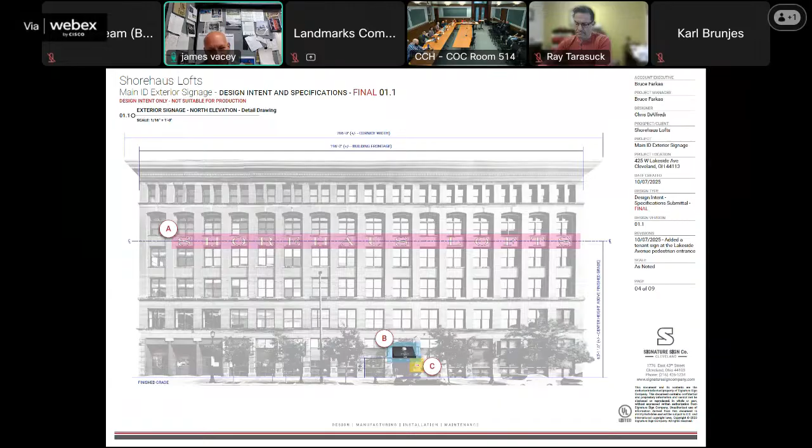This is actually showing a more detailed drawing of the letters on the building. The next page should be the awning. So this is a Sunbrella material awning with heat transfer digital prints on it.

It was brought up at the local meeting that they weren't sure there was downlighting, but yes, there is in fact downlighting. There had been downlighting on the entrance before. The awning itself is non-illuminated.

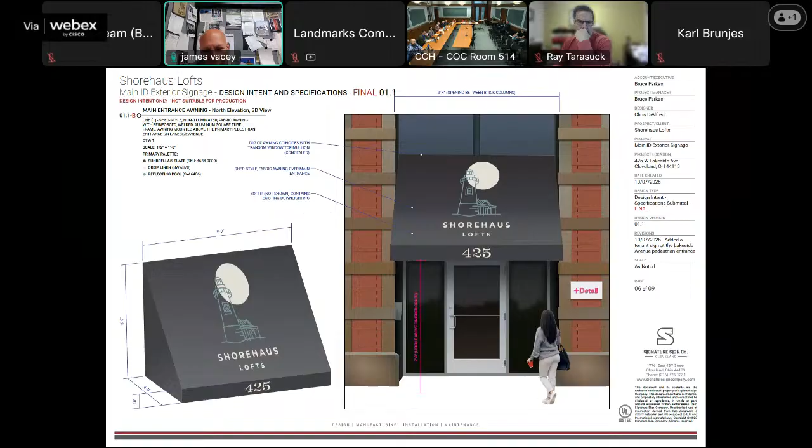And then if you look on the right-hand side, there's a sign on the front of the building for Plus Detail. This entrance here, that's the only business that enters through that door. All of the other traffic through the main door will be for the residents that live in the apartments upstairs. The other businesses located on the first floor enter at another entrance, I think on 6th Street.

There was a question that came up about the detail sign. It looks like it's encroaching on the sandstone, but it's in fact not. It's just the way that the artist or the designer put it in there. It will not be encroaching on that sandstone. It will be in between the sandstone pillars there. And here again, the same mounting will proceed through the mortar joints and will not interfere or damage any of the original brick of the building.

And I think, because it's a residency, we're looking for a variance. I think Dan said it was 403 square feet. That's actually for the letters on the building. So that's what we're here for today. If there's any questions, I'll try to answer them as best I can.

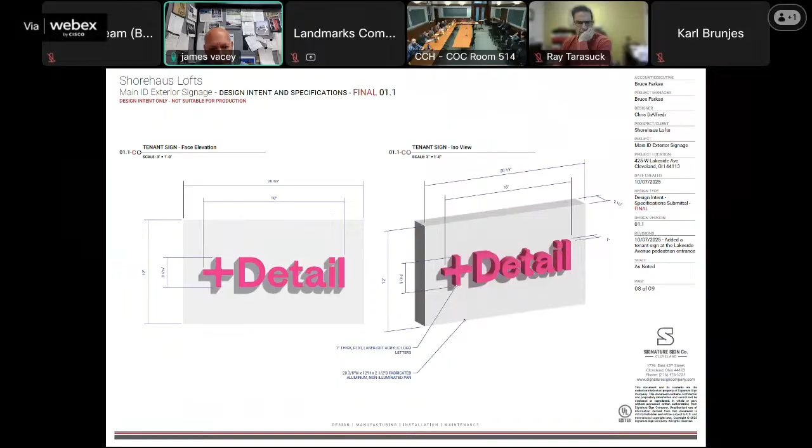Okay, thank you for the presentation. Before we get to our questions and comments, we'll start with Local Design Review Committee feedback.

Thank you, Madam Chair. This project was reviewed by the Greater Downtown Historic Design Review Advisory Committee. They originally came on October 1st, and at that time only had the signage for the Shorehaus Lofts on the building face and the canopy. And there was a lot of questions from that meeting on lighting for the entrance, spotlighting on the awning deck, and then questions about the occupancy or use of the building.

Who's using that entrance, is there commercial units in the building since the signage on the wall would just be for the residential units, and if there's a signage plan for the building - kind of questions on that.

And so through that process, the project returned back on October 15th for review, and they included the Plus Detail signage. And so that's why this project actually has two case numbers - one for the Shorehaus Loft signage and one for the Plus Detail signage.

And at that time, the committee discussed installation through mortar joints and kind of how it's installed and how it works with the residents there and also the commercial tenants.

And so the committee on the October 15th meeting did make a recommendation for the issuance of a certificate of appropriateness with the notation that fasteners be installed through the mortar joints and that the secondary sign, the Plus Detail sign, be located on the brick and not touching the sandstone, as our applicant mentioned, and then support for any of the signage variances needed.

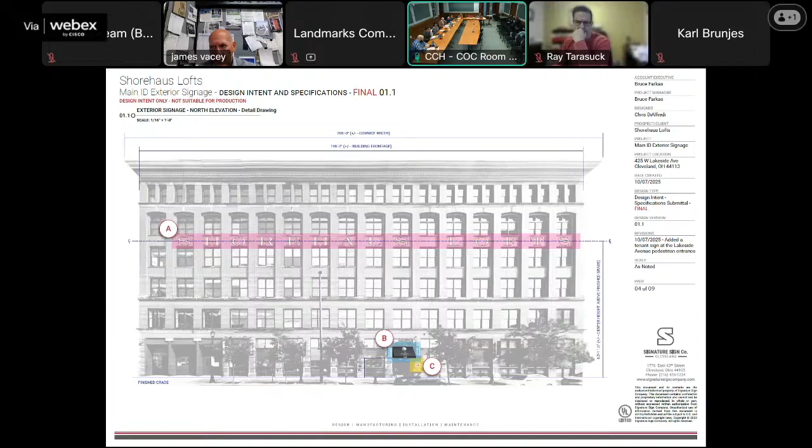And so I don't have any problem with this and would support the applicant in this submission. Thank you, Mr. Strickland. Other questions and comments from the commission? Mr. Lozier? Thank you, Madam Chair. Can you confirm the thickness of the aluminum material for the large sign? It's 1/8 inch aluminum.

So the letters are roughly 4 feet by 7.5 feet. I'm concerned a little bit about the thickness of the material, and to me it might seem too thin to actually be able to self-support itself. Was there any consideration for making that thicker?

I don't think that will be a concern as far as the thickness. 1/8 inch material is fairly thick material, given the fact that the welded studs are on there. I'm just trying to figure out what is your concern.

Well, it's not clear if it's stood off of the building by any dimension. It's right on the building, so it has full northern exposure to the elements. I know it's more robust for maybe smaller components, but for something roughly the size of a sheet of plywood, 4x8, I get concerned about the thickness holding up over time — wind loads, snow loads, things like that on the face. I don't think this will oil can, but just a little bit of concern about the overall thickness of the material.

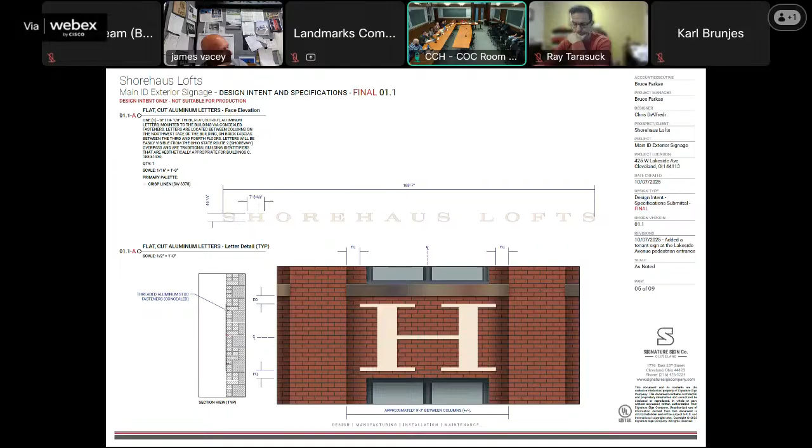Well, we have a lot of history as far as installing signs in the Cleveland area. If you've seen the Cleveland script signs and some of the wayfinding signs in downtown Cleveland, you see some of the work that we do. East 4th Street is another example of some of the signage that we do. If you've seen the new Asia Gate sign on 33rd and Payne, that was one of our designs there that we worked on with Jason Wong.

So we feel that... I was asking specifically about this type of sign and its performance. And do you have specific details on the number of stud fasteners that will be utilized for each letter to provide necessary stability?

Yes, we're going to have Bruce Farkas, the owner, here to shed some light on the questions. So, we don't have a specific number of fasteners. I would expect it would probably be 6. In terms of material, this is 1/8 inch aluminum. It's not that big, it's going to go flush to the wall. I have zero concern about this installation. Zero, of any issues of any kind, oil canning or stability or wind load or any of those things.

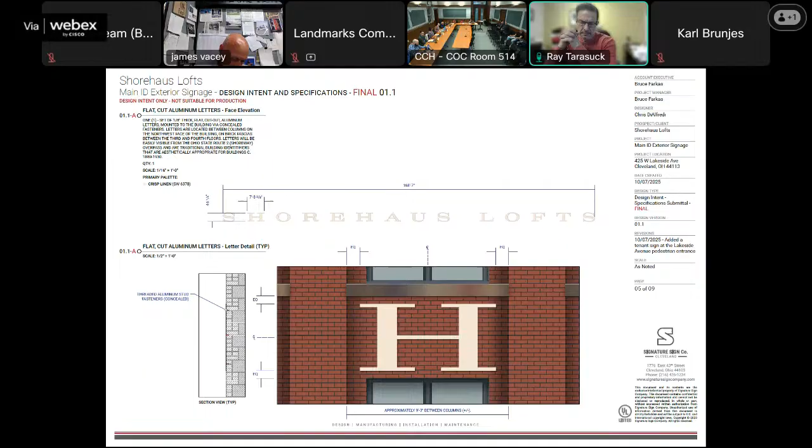Thank you, Ms. Anderson. We have a motion, we have a second. Any further discussion? Not seeing any. Mr. Musson, please call roll. Ms. Anderson, yes. Mr. Lozier, yes. Director Mersman, yes. Mr. Samberry, yes. Mr. Strickland, yes. Mr. Tarasuck, yes. Ms. Strat, yes. I'm sure the motion passes unanimously. Excellent, congratulations. We look forward to seeing your project move forward. Great, thank you very much, board.

Thank you. We'll then move on to our next applicant, located at 11401 Lorain Avenue, Cleveland Christian Home Campus renovations. Good morning. Good morning. All right, so I appreciate everyone's time this morning. My name is Lucas Moore. I'm with CPL Architecture here in Cleveland.

So the Cleveland Christian Home project is in a 1920s building, but it is a behavioral health system that is utilized in this building. So our main goal here is to achieve the certificate of appropriateness to move forward with a building permit that allows us to maintain the historical nature of the building while bringing it up to behavioral health standards of today, for the safety of its residents. On the screen here, you'll see a rendering of the front building.

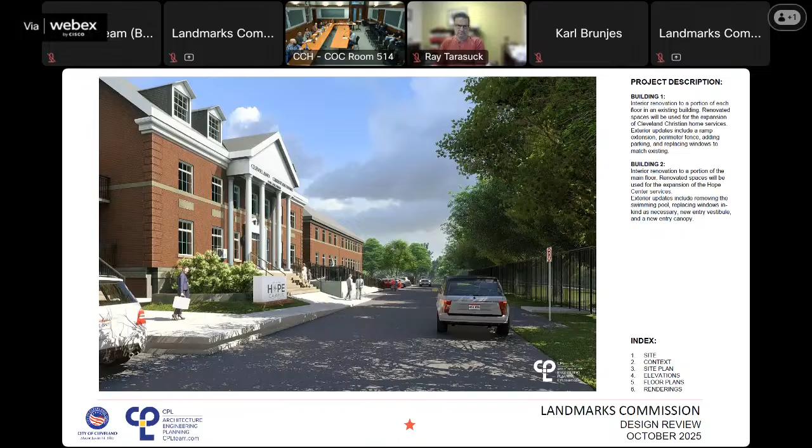We have modified the windows for replacement so that they are better suited for handling behavioral health units. Existing units are gridded with integral blinds, but they are double hung windows. You'll see here that we have added just vented windows at the top. In situations where it's inappropriate for residents to have access to operate those windows, the simple hardware will be removed for the safety of those residents, but it will maintain a consistent look across the front of the building to try to maintain the historical value. If you could move forward to the next slide, please.

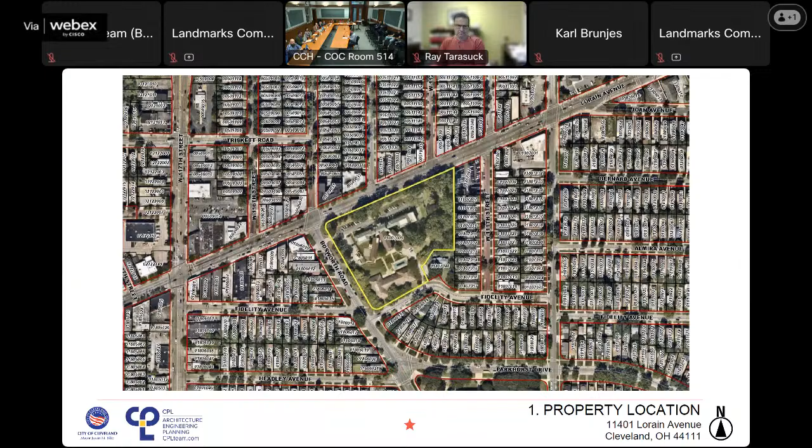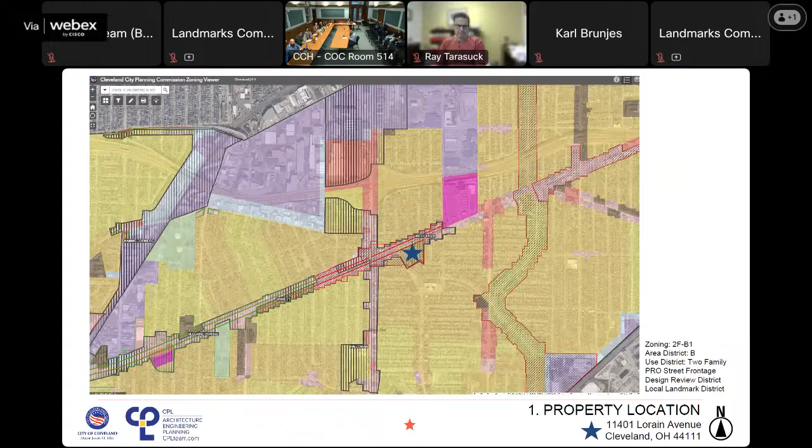So going through the checklist here, the next two slides are looking at our zoning information. On the next slide, you'll see that we are in a historical district itself. And then if you wouldn't mind going to the next slide.

Some existing background on the two buildings that we have on this campus and the work that's being done. You'll see going around the building there is a lot of trees and landscaping, but we also have to have our secure perimeter, not only to help the residents prevent eloping and leaving the campus, but some of the affiliations of the residents have had issues with outside influence coming into the campus, which would affect the treatment of the residents. So you'll see that we do show some fencing, for instance in image 4, that we are looking to expand on and replicate, as you'll see in future slides.

But the existing state of the building, image 5 there on the closest window, you can see windows that have been recently replaced from an approval from February of last year through Landmarks. So the rest of this facade is now on this approval. The front entrance that you see in image 6 of the main building, those columns are being replaced in kind. We have found a manufacturing company that can replace them almost exactly without needing to laser or 3D print anything.

On the lower portion of the slides, you'll see 7, 8, and 9 are actually a separate building, currently or previously used as a school, but now will act as a welcome center, having a new drop-off area. This building will be used for residents coming in 23 hours or less, so no sleeping overnight. These are residents and children who are being brought here due to their parents maybe getting arrested or being displaced, and currently they're being housed in whatever social office they can be in. So now, with this moving forward, they would be brought to this system, receive the care and attention they need, and have a safe place to stay while some things are being figured out outside of their control.

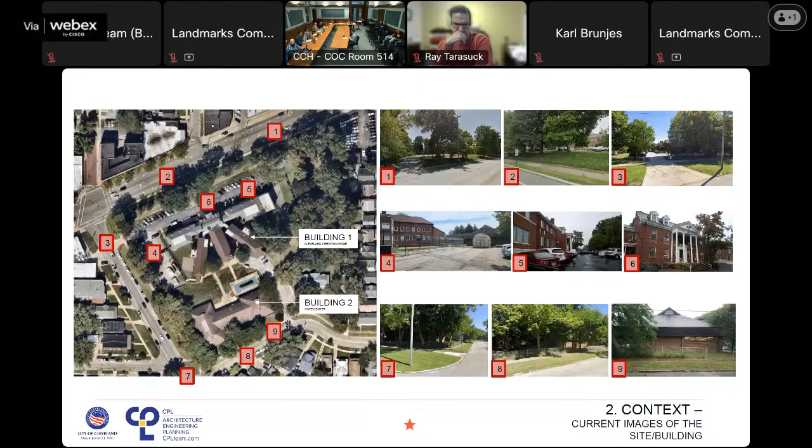On the next two slides, we have some site information. So we are enlarging the site plan as it is today, mainly because of the advancement in the treatment course that we're trying to do. They need additional staff to give more one-on-one treatment to these residents, so we are expanding that staff parking lot.

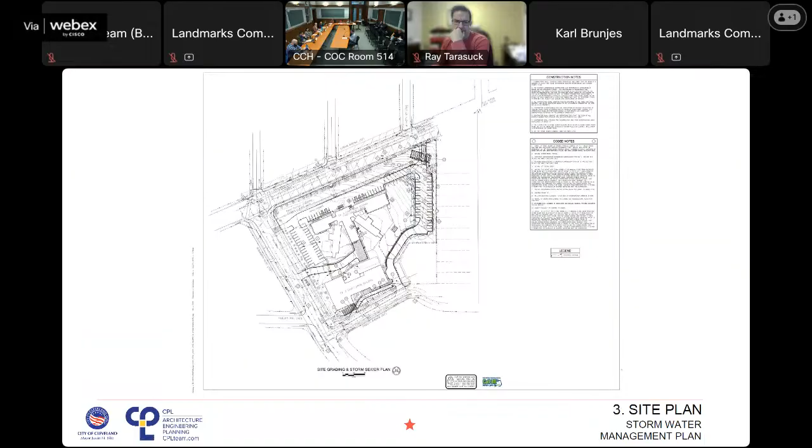The next several slides address some of the checklist items. We wanted to provide everyone with the erosion control and our underground water detention. If you wouldn't mind skipping ahead to slide 14, where we actually get into fencing, Jessica, you'll see those are just a lot of our underground and water treatment or water retention details.

The next couple slides are our elevations. On the next slide, you'll see the existing windows on the topmost elevation. You can see some of them are grayed out, but the remainder will be replaced in kind with that vented model. If you go to the next slide, there's more of a graphic to present that.

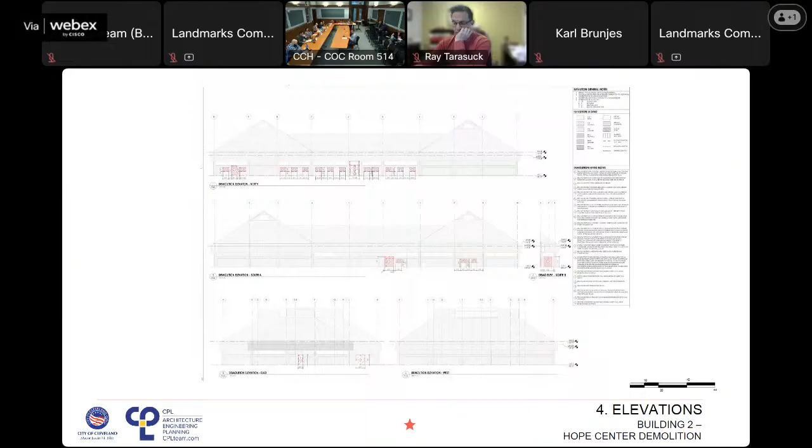The next several slides are for your reference as you're reviewing, showing our floor plans. This is on a separate permit. There are a couple more elevations of the second building as well. That building is being replaced in kind due to some poor conditions of the windows today, so those will be replaced. This building was built in the 1980s, so it's less historical, but still within the historical zone.

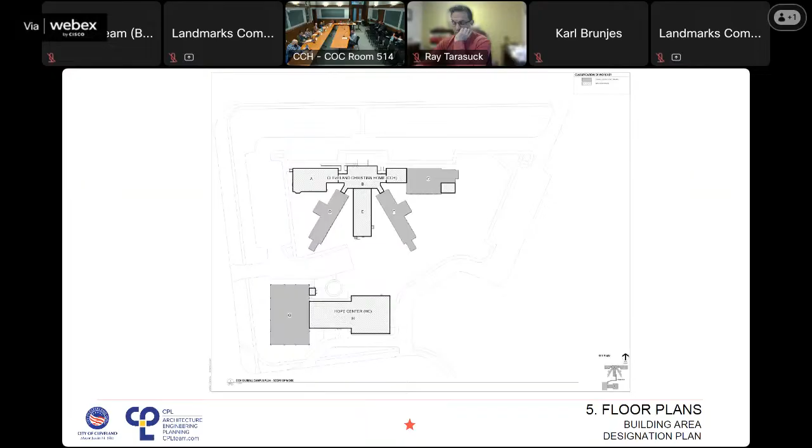If you could move forward please. Keep going please, there's sometimes a delay. It's okay, this is just to help with the floor plans. This is our key plan to show you where the next several slides of floor plans are referenced, for your reference of what is going on in the interior.

We can go through these quickly. This is on a separate permit, so we were able to start some of the interior renovation work early, as it did not affect the exterior of the building.

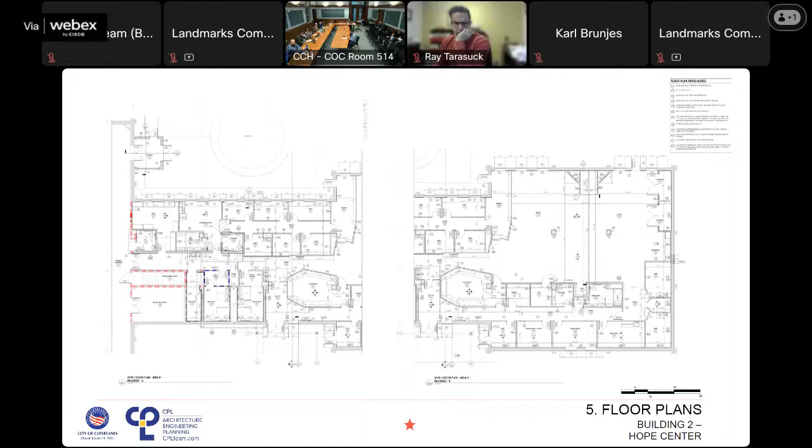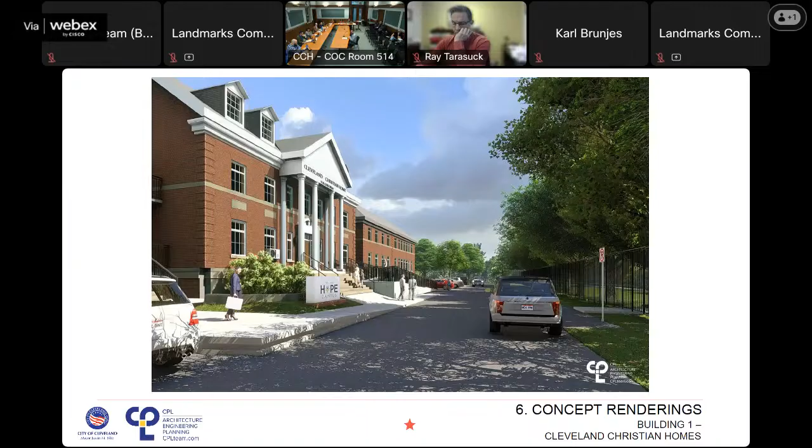The last two slides reiterate the rendering that we saw on the first slide. We did update this after the meeting last week to show those windows more consistent with our design intent. The next slide shows that second building's drop-off area, to give it more of a welcoming site for kids who are currently going through some traumatic instances.

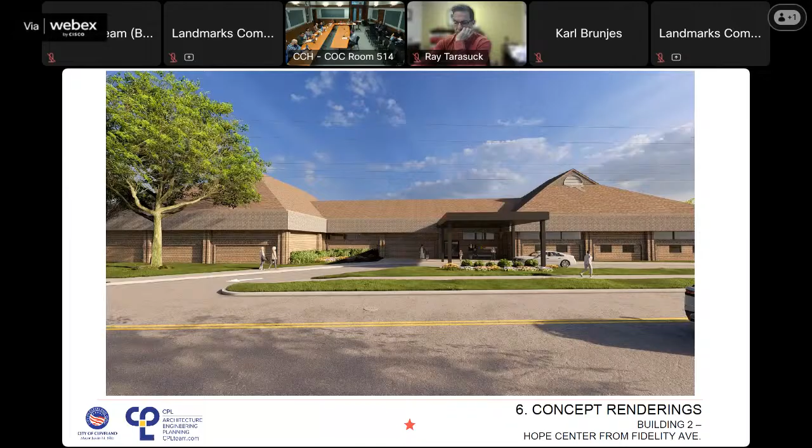So I appreciate everyone's time today. Is there any questions? Thank you for the presentation.

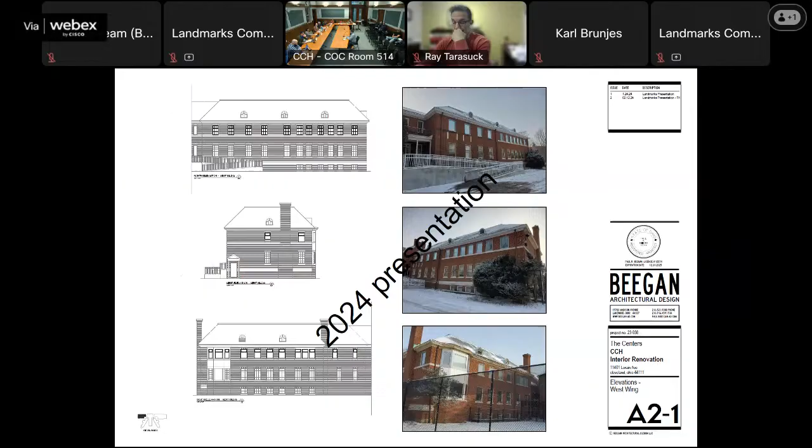Otherwise, we have more detail than the local committee had regarding the windows, which is likely where their questions came from. On screen now are the 2024 windows you approved, which are being proposed as replacements on all elevations, mainly the front. Staff is supportive of these for the wings, but we'd like more detail for the center section, which has cottage sash windows on the first floor with slightly different window treatments. We'd like to see how the proposed replacement lines up with the original windows, which are still intact.

That's a summary of our comments and concerns.

We'll now open the floor to the commission for questions and comments. Ms. Strickland, would you like to start us off? Thank you, Madam Chair.

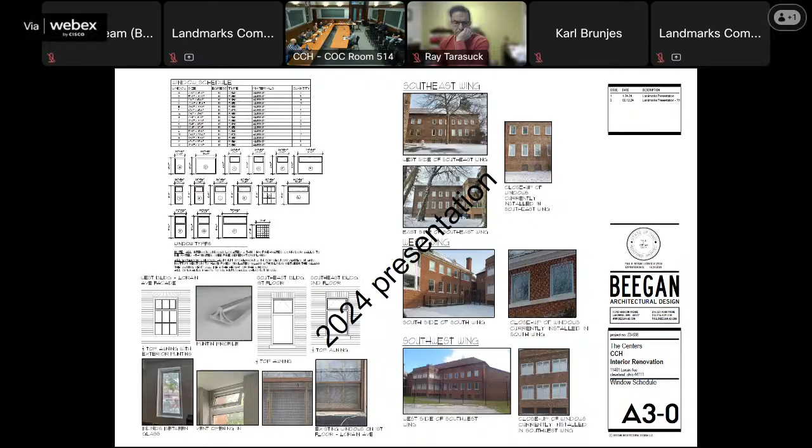I'm curious about the 10-foot high fence. Will that require a variance from zoning for a fence of that height, given its distance from the street at the front of the lot? I don't know that it will, though one would think since it's in the front of the property it might. We haven't gotten feedback on that yet, but it's a good point—whether it's in the front or back lot, fences are treated differently, and that's something we can certainly look into.

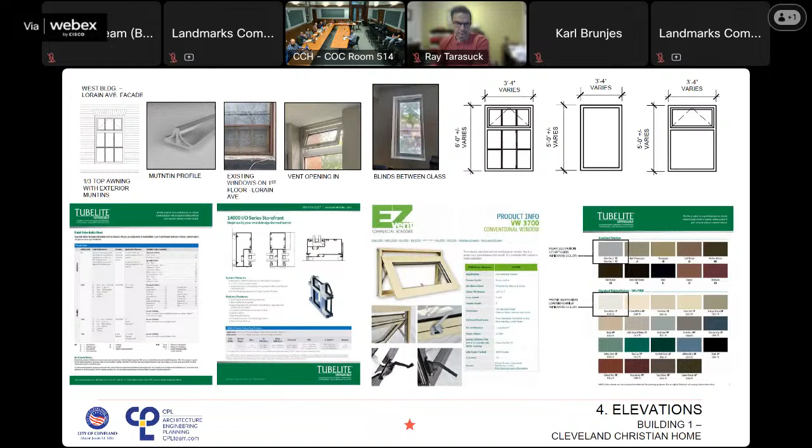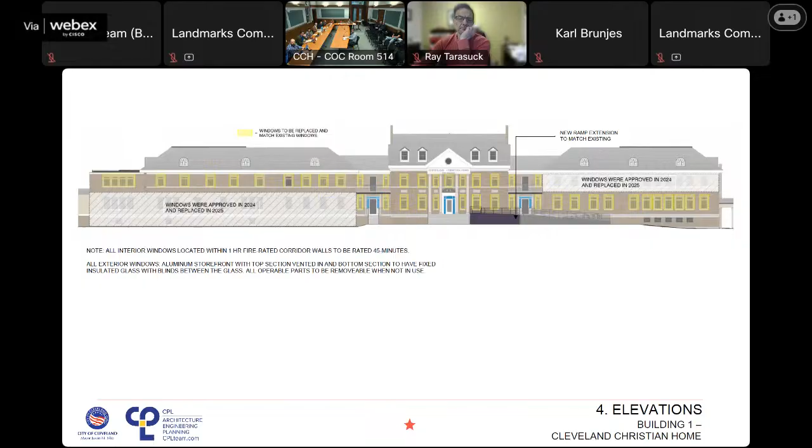The other question I had was about the grids on the windows. We quickly went through the existing elevations, and I think predominantly the windows are 6/6 double hung, is that right? Yes. And you're proposing essentially 3/6? Yes, in this instance, trying to maintain... actually, if you wouldn't mind going back—it should be the 5th page.

My question is similar to what Dan suggested—especially in that center section, there would be a strong preference to replicate the grid pattern that was there originally, a grid of 9 on the bottom and 3 at the vent. Would it be appropriate to limit that to the center section, since we recently approved replacement windows elsewhere with different grids? Personally, I think the proposed grid pattern is close enough that it represents what it looked like historically, but that center section should still be studied further.

Other questions and comments from the commission?

Mr. Sandberry: Thank you, Madam Chair. I guess my question is to Mr. Secretary. Can you jog my memory on the last application? Typically, we look at these projects holistically. Why didn't we look at the entire project at that point and only focus on a couple locations?

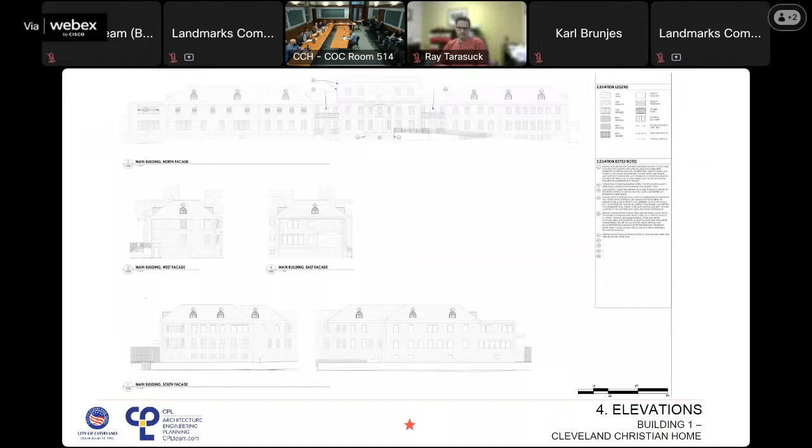My follow-up question is about the fencing, but not on Lorain. I think we've talked enough about that. On the eastern property line, that abuts residential, the intent is that's a 10-foot tall fence.

There's actually an existing fence today that many of the residents are attached to. So we are going to pull back 3 feet from that line to build a new fence that would be anti-climb. We're proposing weed barrier and gravel so they can maintain it without affecting any of the residences.

Fencing-wise, it's a little hard to tell from the aerial view, but there is a line of what looks like old growth trees along that property line. I don't know if that's on this property or on the residential properties.

Those will actually fall between much of the parking area and that fencing. A lot of that is small growth, so any odd trees sticking out are rather insignificant, I'd say. Many of the major oaks you'll see in an aerial or walking the site have been greatly impacted and are dying, or we're trying to avoid entirely.

I noticed on the one site plan the grouping of trees in the corner. But it does look like, just looking from above, there's a line that aligns with that, and those aren't shown on the plan as you continue south.

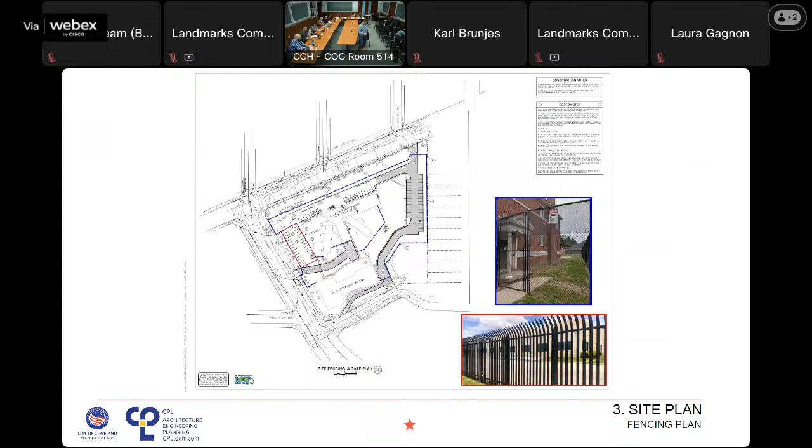That concludes our certificates of appropriateness. We'll now move on to our schematic plan reviews. Our first applicant is located at 1560 Mistletoe Drive, the Music Settlement renovation and addition.

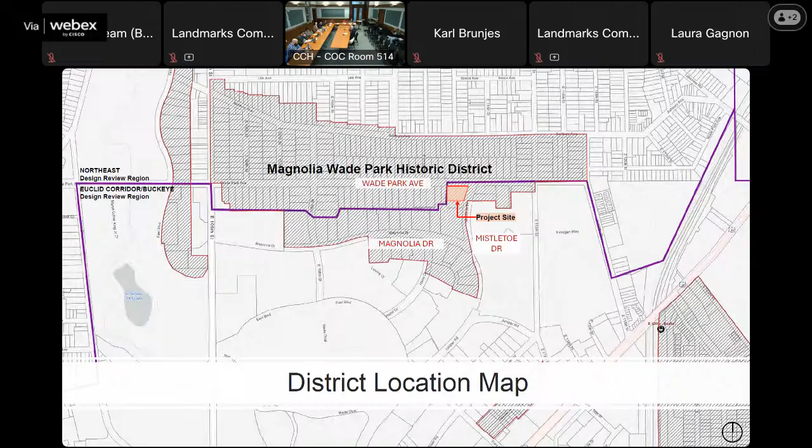The project site is at the corner of Wade Park Avenue and Mistletoe Drive, as part of the current Music Settlement campus on University Circle.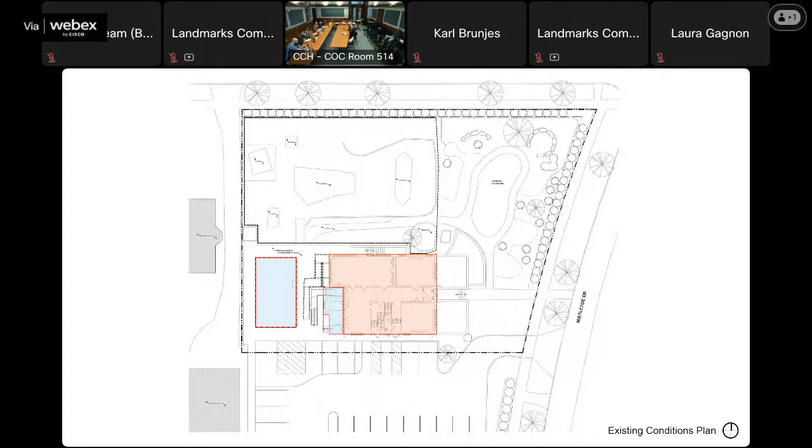This is an aerial view from the south looking north. You see the existing Grien House, and in the orange rectangles are the two structures I mentioned earlier: the percussion garage directly adjacent to the west property line, and the small later addition proposed to be removed as part of the project. Also visible is an existing playground used by the early childhood program that is part of the Music Settlement, which is being retained, though in a smaller configuration.

Directly at the corner you see pathways and green areas — that's the outdoor classroom, which is being retained as part of the project. So we're not proposing any changes directly at the corner of the site. South of the building is the existing parking lot; most of that is being retained. We are losing a couple spaces, but for the most part it remains unchanged.

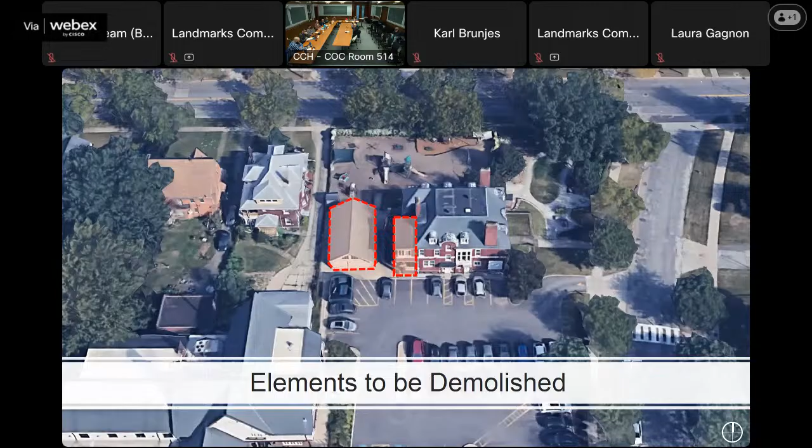This illustrates the proposed footprint of the addition. You can see it sits directly where that percussion garage is, extending a little to the north and south, and then joining the Grien House in the area where that more recent addition is being removed.

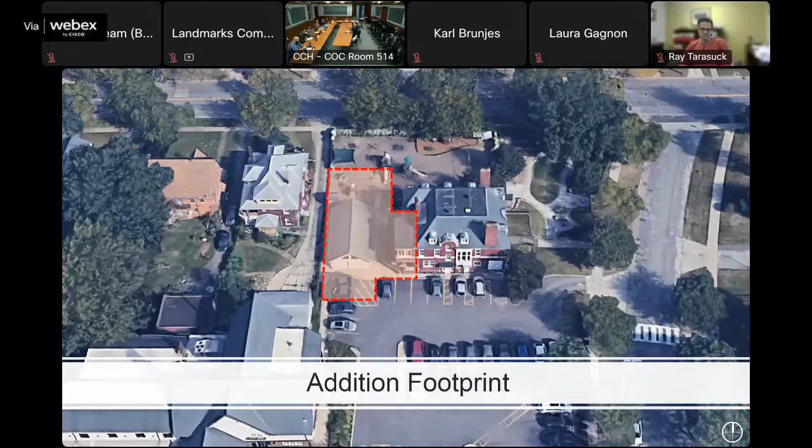These are some photos with a little more detail on that rear porch addition. It looks like it was built in at least three or four different sections — some very strange additions providing storage, an odd little bathroom, and a fire escape that is also being removed as part of the project. So we're looking at removing and cleaning up this portion of the house.

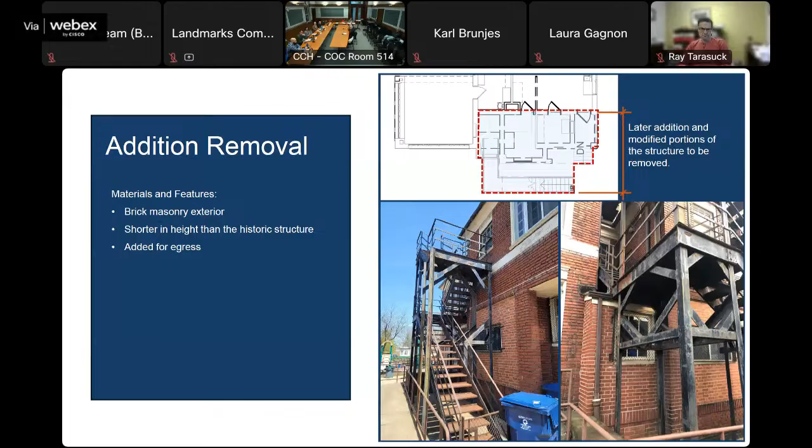We're really looking to establish a welcoming and accessible new entry to the school program, as well as providing new classrooms. The large rooms within the existing house will be used for quieter instrumental instruction — pianos, harps, electric keyboards. The addition on the left is a 2-story structure with 3 larger classrooms on each level for their big and loud programs.

They've got rock, pop, jazz groups that they provide instruction for. This will also provide an accessible entry to the program, restrooms to support the new classrooms, as well as accessibility to the house. Right now, the house itself is not accessible. There's no elevator, it's up about 30 inches from grade. So we are introducing an elevator to provide access to all levels.

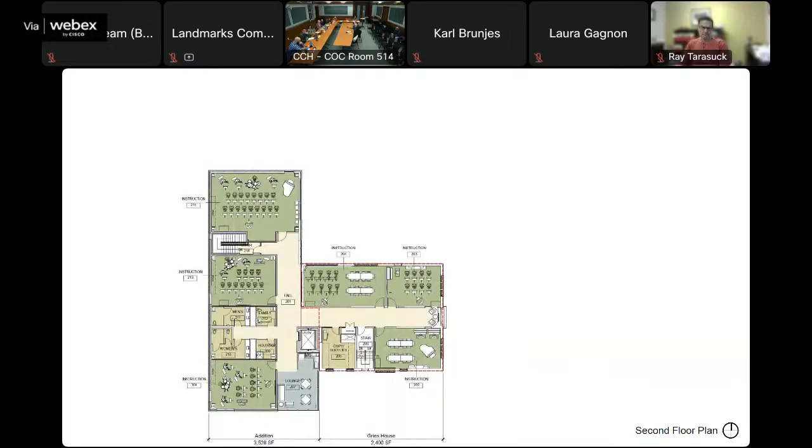So really looking at placing this addition to provide some continuity to the campus, as well as a very nice and recognizable entrance to the Grien House. Next slide, please.

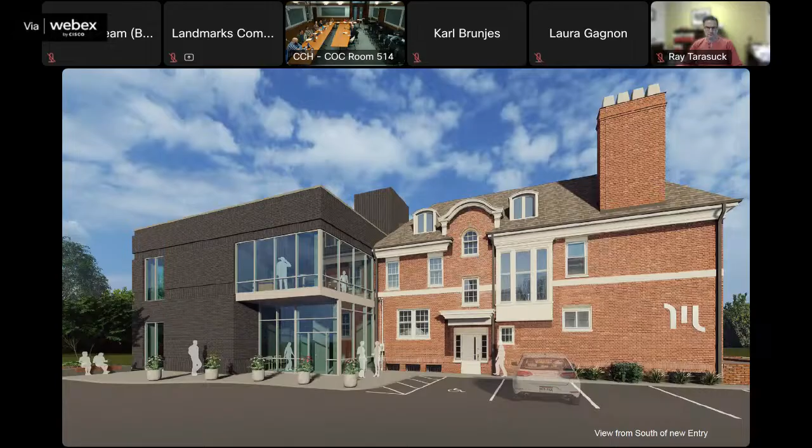Okay, so this is the first illustration of the outside of the building. You can see the rectangular addition on the left, the existing Grien House on the right. Sort of center of the image then is this glassy entry right at grade, so easy to drop off, bring the instruments and the kids in, with that glassy lounge above that to provide a nice, bright and recognizable entrance to the building.

We are looking at picking up on subtly some of the horizontal banding from the Grien House through the brick and some of the horizontal elements of the addition. The rendering may not illustrate the different finishes, you know, every screen has sort of a different look to it. We do have some additional photos, but I did bring our proposed brick, which is a darker brick.

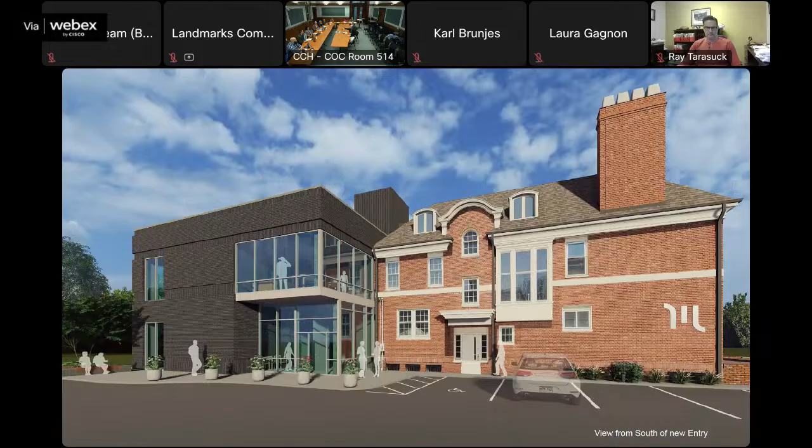And the Grien House itself, to bring an actual brick from that, is actually a little bit darker than it appears in the photos here, so hopefully you can see that. So the contrast isn't as jarring as it may appear in these illustrations, but it is intended to be distinctly different while picking up on some of the darker brick that we do see in the other parts of the campus. So again, trying to create some continuity between the 2 projects while still being deferential to the Grien House. Next slide, please.

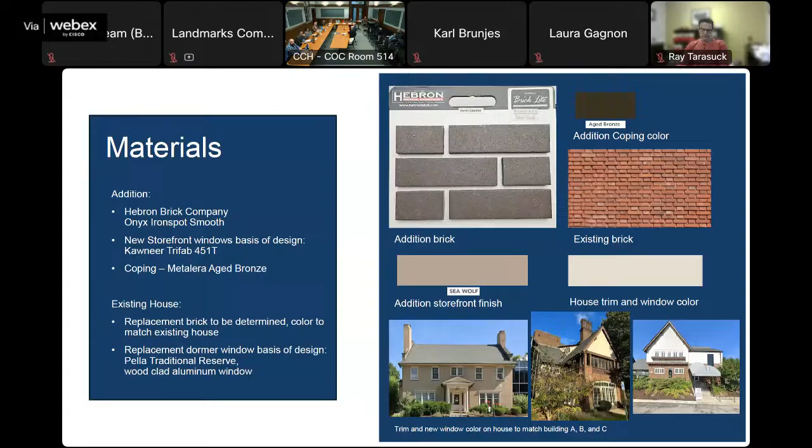All right, thank you. Before we open up the floor, if you'd like to respond to the local comments—just a couple things. There was a lot of discussion about the brick color, but that presentation only had the illustrations we had. That's why for this presentation we added photos of the brick in context with other buildings, some campus context photos, and brought samples with us. Those were not available to the last review group, so I wanted that to be clear.

It was definitely one of the most diverse pieces of feedback we've received, and I mean that in the most professional way. Several members were strongly in favor of what was proposed, and other members had comments that were not in agreement. So it was an interesting review.

I would also point out that it was a good conversation, and the disagreements even among those board members were about the color of the brick, not the basic design. There was strong advocacy for why we weren't matching the brick. We discussed that oftentimes when you try to match brick, you're not successful—it looks slightly off and like a mistake. So our intention was not to match the brick of the Gries building, but to take a compatible but contrasting approach. Thank you.

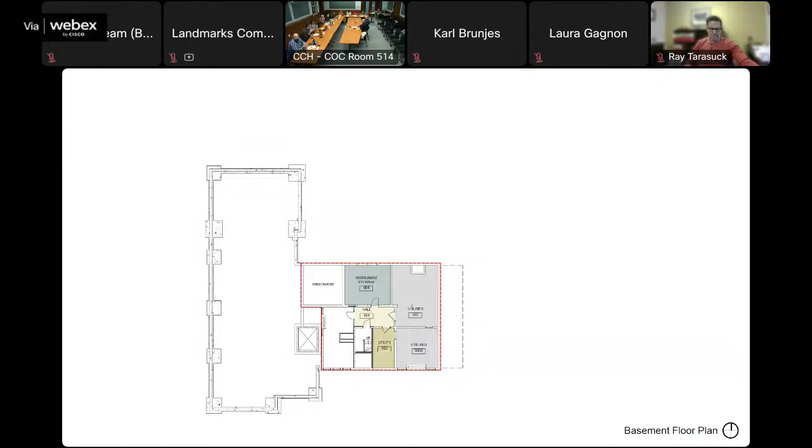The site. We didn't... I mean, there wasn't a lot of development as part of this. No, this is really just looking at the addition. I guess looking at the northeast corner, there are also some trees that live within that landscape. I'm assuming those are probably maintained as part of this overall.

Absolutely. So I think that's also helpful to the presentation and the renderings - there's probably a level of what does this look like from the street with all of that vegetation still in place, but also getting other views that show what it looks like when you're closer to the building. Because I think that helps us and the public see it in actual context. But again, the level of renderings are really helpful to understand all of that. So those are my comments.

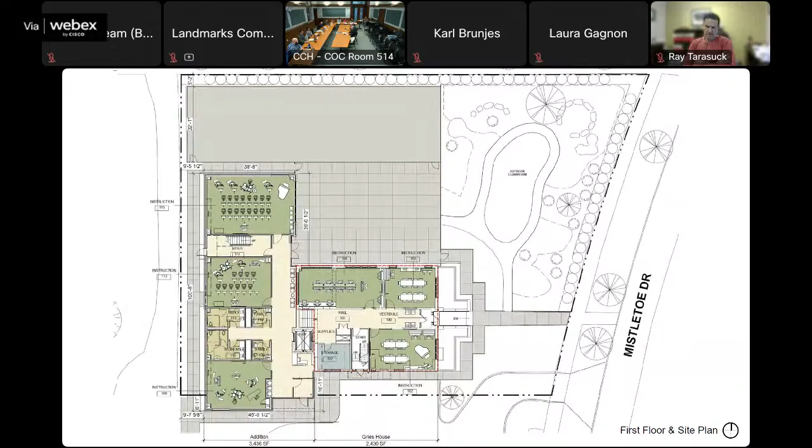Not that they're all residences today. I understand that they are mostly owned by other organizations. But the addition, as viewed from Wade Park Avenue, I don't think it's

deferential to the other buildings on that street. And that's really the street where you see it the most. It is tucked away on Mistletoe Drive, and it's probably not very visible from Magnolia, but it is going to be front and center on Wade Park Avenue. And so I think it would be helpful to see an elevation of that street and how it relates to the buildings next to it, in scale, in relation to that whole side of the neighborhood.

It kind of feels like in this presentation, it's just had its back turned to those buildings. And I guess I would like to see it speak to that neighborhood a little bit further.

So I do agree with following the banding of the existing building. I would probably not pull colors from the other buildings. I would treat this as its own building. So if you're going to pull colors from other buildings that were historically not related, I would pull them also from other buildings within the neighborhood and not just this campus. So I guess treating this building as its own building, separate from the rest of the campus, separate from the rest of the neighborhood.

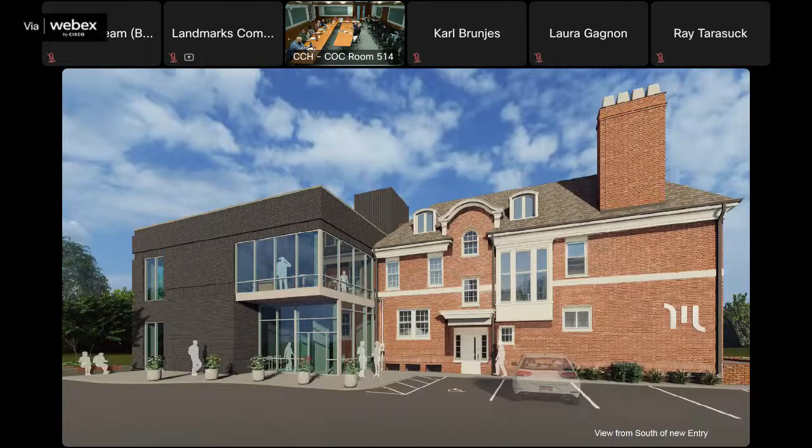Would we be able to go back to the renderings? There were the four renderings on the page. The elevations, yes. Thank you.

This is a Georgian colonial house, and there's a great deal of symmetry in this style of home. If you're looking at the rendering on the lower left-hand side, I think it would improve it to have the band on the far left side go all the way up with the brick, so that it's more symmetrical. You're keeping some of that symmetry, which overall this building doesn't have, but acknowledging and incorporating that would be something important.

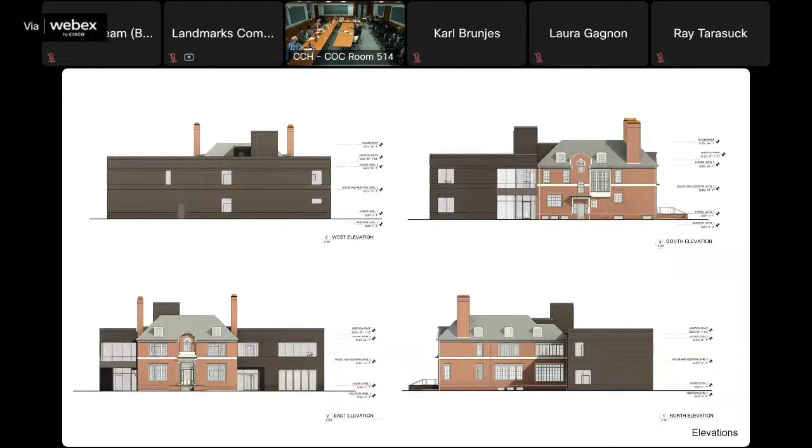Yeah, those are basically my comments. Thank you. Thank you, Ms. Anderson. Well, you've received a lot of feedback, so I will only add very minimal stuff.

Someone very smart used to say the devil's in the details. I do think studying the opportunity for that hyphen, and giving a little breath to that existing building, is worthwhile. The program, I think, makes a lot of sense. The massing can make sense if you incorporate some of the feedback you've received, bringing either the banding or the symmetry around that connection to the existing building.

The only thing I'd add is I'm assuming the elevator overrun seems fairly large. If there's an opportunity to bring that down to align with roof level, so it doesn't feel like it's trying to be a chimney, that would help — it throws the focus off in some cases, or will. So if you can minimize the visibility of your elevator overrun, that would really help.

Then, as you look at the brick, potentially consider going more modern with the color but using a less modern cut for the brick — something with a little more texture to relate to the profile of the historic bricks, but a different color, or vice versa. Go with a more modern cut for the brick and a slightly more historical color in the warmer family, to really allow that separation but achieve everyone's goals.

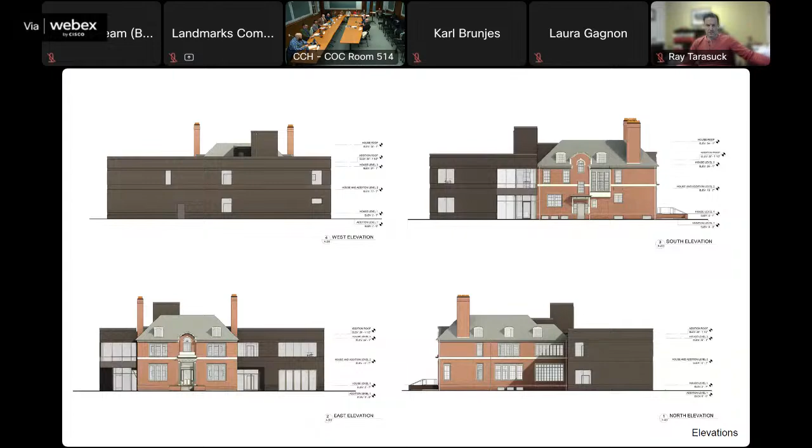I do think in one of your slides, you have all three of the buildings with the sample next to them. I think it's really obvious in this slide that it's important what your joint thickness is and what your color of mortar is. I would like that to align more with the Gries House than the rest, because the other building has a very thick, very dominant mortar joint, and I don't think we want to match anything like that. That's all.

Thank you. So do you feel like you've received enough feedback to continue the development of your design? Absolutely. Okay, they could go on. We'll then conclude our feedback. But obviously, if you have any questions, reach out to staff related to the feedback, and we look forward to seeing you come back with further development of your design. Okay, thank you very much. All right, thank you. We appreciate the feedback. Thank you.

That concludes our schematic plan reviews for today. We can then move on to our landmark nominations. We have one nomination located at 10311 Ramona Boulevard.

Good morning, Madam Chair, members of the commission. I am here to present the Helper Crosser residence at 10311 Ramona Boulevard, located in Ward 4. The primary research was originally conducted by AmeriCorps community surveyor Emily Spasia Swift, and this nomination is at the request of the homeowner, Ms. Elizabeth Thomas. Next, please.

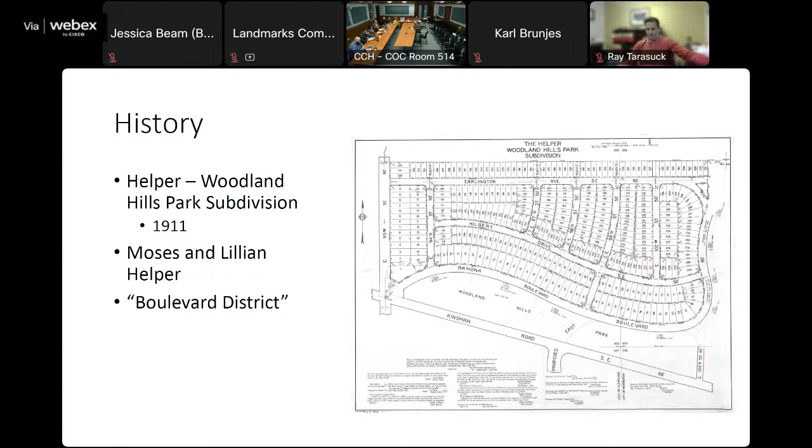In February 1911, Lillian Helper purchased 52 acres of land from the Johnson Realty Company for their subdivision. She and her husband Moses included deed restrictions, including setbacks and minimum price of construction. Moses had been in business as a real estate agent for a few years prior to this subdivision. Next, please.

Moses Helper came to America from Russia as a child. At the start of his career, he relocated to Barberton as a shoe salesman and began dabbling in real estate. He returned to Cleveland in 1907 and established his own business. He worked as an allotment operator, assisting in the sales of the lots, but not necessarily building the houses. He grew successfully in this business and began acquiring more properties and building houses on them. By the 1940s, he was noted as having laid out 65 subdivisions, including approximately 25,000 lots, and built more than 3,000 residential units and several downtown commercial structures, not only in Cleveland, but in Avon, Bedford, Euclid, and Solon. Next, please.

In a little over 25 years, the allotment was nearly completely built up. Due to the area not being annexed until 1913, there are no building permits available for the earlier construction and for our research property. Next, please.

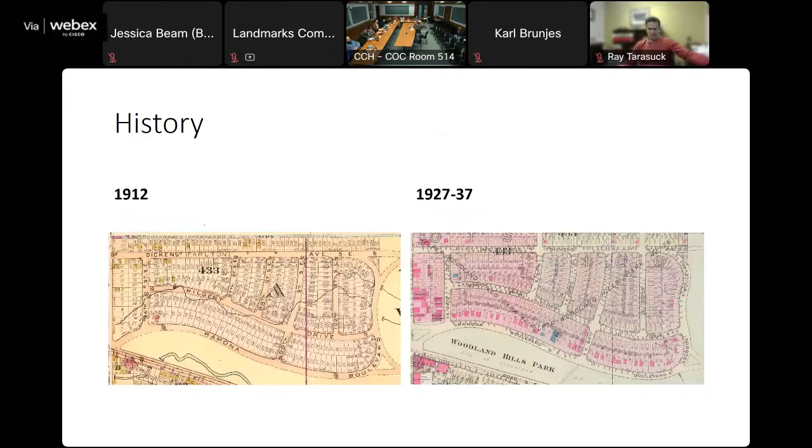However, the Helpers did commission an architect, which made good advertising for the allotment. The $12,000 home, about $400,000 today, was designed by Daniel Reamer. Reamer was originally from Oberlin, and after relocating with his family to the south, he returned to Oberlin for his education. He had an architectural practice in Birmingham, Alabama, and Chattanooga, Tennessee, prior to coming to Cleveland in about 1910. He is mostly known for his works for his father on Reamer Place in Oberlin and the Reamer Barn for his uncle. The latter structure was added to the National Register in 1979. The Helpers did not live here for very long, as they sold the property to Robert Crosser in 1915. Next, please.

Robert Crosser was also a child immigrant, arriving at age 7. He became a lawyer and was later elected to the Ohio House of Representatives. He authored the Initiative and Referendum in Cities Law, which allowed citizens to call for a referendum vote on any ordinance that a city council enacted. He was appointed chair of the Initiative and Referendum Committee to propose changes to the state constitution in 1912. That year, 34 of 42 proposed amendments were adopted by the voters, including the I&R proposal.

He was elected to the U.S. House of Representatives in 1913 and served for four decades. Next slide, please.